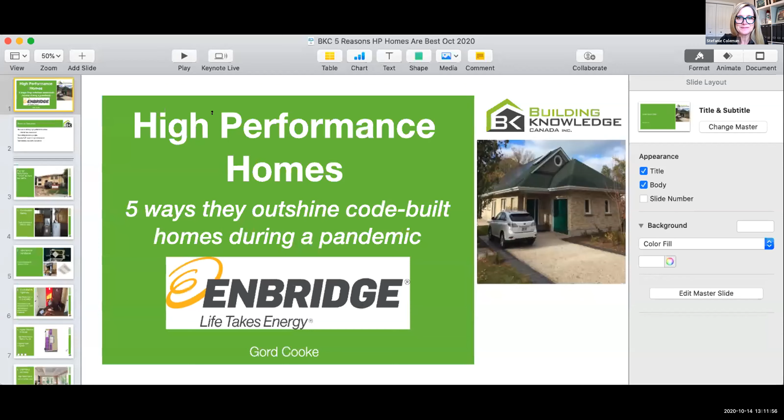So first, let me just thank Susan again. Susan's such a great friend. You and I have traveled together, been to various events. Such a great partner in the industry. I just can't speak enough. Of course, you always give me this opportunity to speak. That's so kind of you. But then that lovely message, as you just mentioned, is in this time of stress, let's try to be non-judgmental. Let's just help folks out. So thanks, Susan, for that. I really appreciate it.

And as Susan said, this seems like a timely topic. Well, I got my first question in mid-March. My own brother said to me, "This is probably stuff you know about, right? This idea that somehow the air quality, that we could help manage air quality." So I've written a couple of articles on it, done some research on it, trying to stay in touch with what exactly we can do in the housing world generally, or in the building world generally, to help with. And let's be really clear, it's still about physical distancing. It's still about hand washing. It's about managing, understanding the way the virus is in how it infects, that it has to be breathed in. And so we have limited things that we can do, but we're still going to be a part of this.

And I'd like to highlight that today, just the kinds of things that you can do. A very important theme, though, is the same things that you do to make houses energy efficient, high performance, are frankly the same things that we've known for over 40 years improves air quality, or at least the opportunity for air quality, health, comfort, wellness. So that's the most important thing.

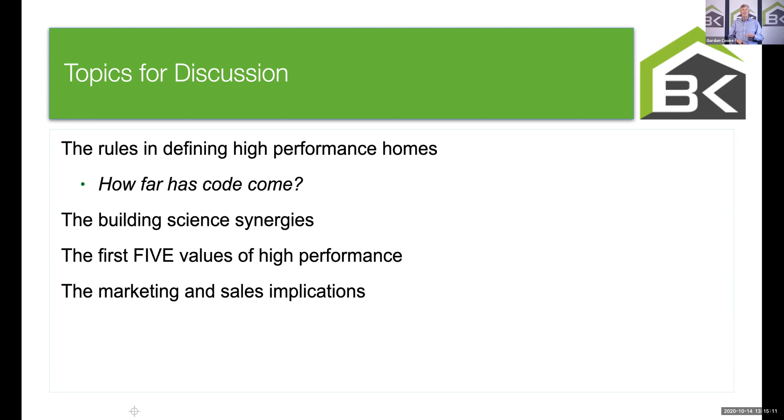And then Steph said, let's do 5 values. Of course, there's more than 5, but I'm going to try to highlight 5. And some of you will know that I kind of bridge between the technical side and the sales side. One of the questions you're going to ask me, is it okay for us to talk about this? I don't want to make it sound like we're selling snake oil. I just finished a series of webinars for Fortis BC for HVAC contractors on what's okay to say to homeowners, what is legitimate and what might be seen as taking advantage of the situation. So I do want to talk to you a little bit about the sales side of this and what is appropriate for you to say on the marketing and sales side. So let's get started and think about that.

I'm showing this image because this was an R2000 house. My good friend Ron Seaman, he was a builder. Now Derek and his son have taken over. They've built a couple of net zero places for myself and my family. This is a house that they actually built in 1986. This was Ron's house and then became his office. Thinking about home office spaces, you'll notice this was actually spray foamed from the outside. That was their methodology. And so these were the early days. 1982 was the start of the R2000 program. So I thought I'd give you a sense of back then. So that's almost 40 years ago, 38 years ago.

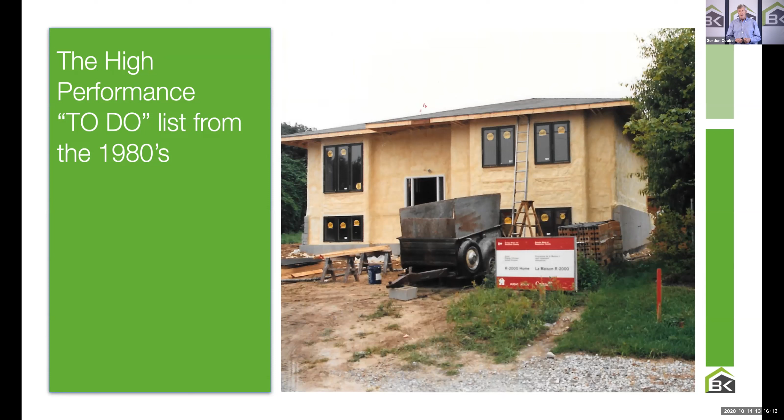What did we think was high performance back then? And there was actually a list made of the things that you should do, and more or less in the right order. That is, what order should we be thinking of these things first? So let's get started. A quick little list, 10, 11 items. If you're a note taker, take notes, or Steph, you're actually going to provide the presentation at the end, but it's useful to take notes just as a bit of a memory aid.

So the first thing you need to recognize is back then we had spillage susceptible appliances, natural draft appliances. And the very first element of a high performance house is in fact combustion safety. Getting to direct vent, sealed combustion, understanding combustion processes. After all, you wouldn't want to kill anybody. This was the ultimate in indoor air quality. Can't have a high performance house if we have the chance of carbon monoxide spilling or the chance of carbon dioxide and nitrous oxide spilling into a house. So you can start to see, even in the earliest days, there were concerns and issues around indoor air quality in high performance houses or in houses in general.

And what you should know is the directives came in code. So we recognized that in the early 80s. And in 1990 in the Ontario Building Code, 95 in the National Building Code, there were specific mentions made of the possibility of combustion backdrafting, spillage of appliances. In the Ontario Building Code, we started to move towards high efficiency equipment. In the National Building Code, there were just sections in there that said if you were putting in chimneys, you've got to do some work to make sure they're not going to backdraft. So the code kind of caught on to this one early on. It wasn't completely done, I would say, until a few years ago, where now high efficiency furnaces, direct vent sealed combustion furnaces, are a code requirement, or actually an efficiency requirement.

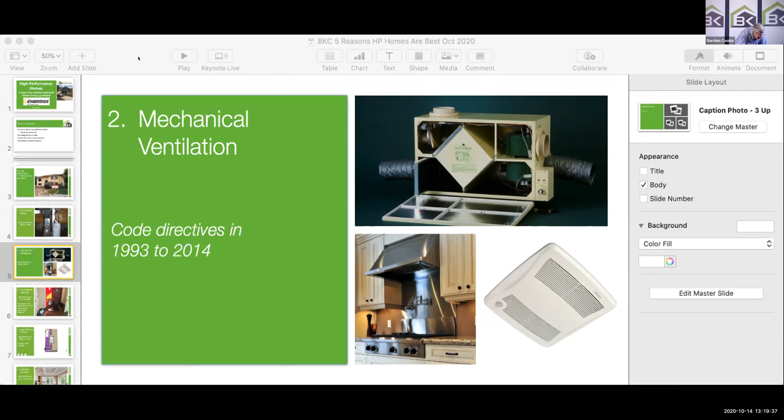Okay, so I'm not sure what you heard or didn't hear. I will just let you know that the second item on the list was mechanical ventilation. That is, number one on the list was combustion safety. Number two on the list of high performance elements was the capacity for continuous mechanical ventilation. Back in 1982, it became code in Ontario in 1993, made its way into the National Building Code, I would say more comprehensively in 95.

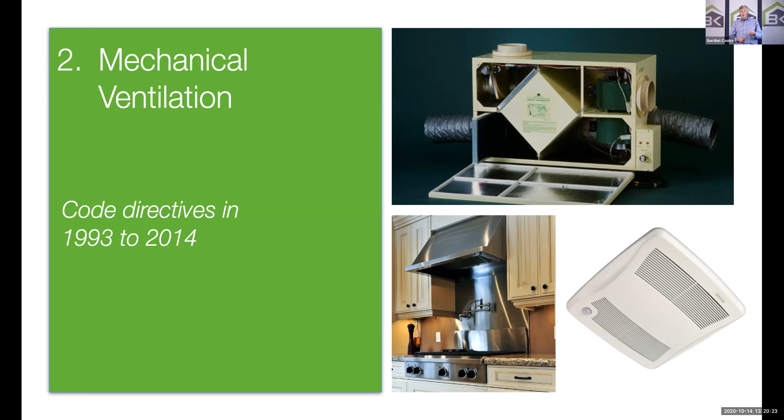It wasn't until 2014 that HRVs became more or less ipso facto code requirement in Ontario. Still not a specific code requirement in the National Building Code, but certainly strongly encouraged. So number one was combustion, number two was mechanical ventilation. Number three on the list, through work from Harold Orr and others at the University of Saskatchewan and Ottawa, was air tightness. And as early as 1982, the R2000 program set the bar at 1.5 air changes per hour at 50 pascals. That's still considered to be the go-to level for net zero.

The passive house folks in Germany have said, let's go even tighter than that. Oddly enough, this is still not a code requirement, even though it was number three on the list of things to do, and still is the most important thing that we can do. We haven't made it into code in terms of a performance metric. We have some prescriptive requirements, 17 clauses that say make a house tight, but other than Vancouver and BC now in total, that's the only place in Canada that now requires air tightness testing.

Interestingly enough, in the United States, 28 US states now require blower door testing of all houses to an air change level of 3 in northern zones to 5 in southern zones, but at least they have that on their list. So we're still waiting for performance measures in the Canadian code, even though we've known since 82 that this is the single biggest thing that we should be doing from an overall high performance element.

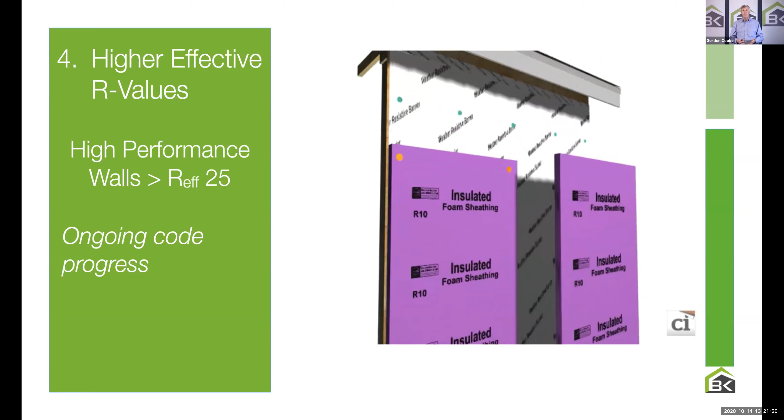Number 4 on the list is higher effective R values. Imagining ourselves getting to primarily continuous insulation, doesn't have to be continuous insulation, but the idea of effective R values, that it's not just about what's in the cavity, but what's the overall performance. And the codes are moving towards that. I'm going to give you a metric. I'm going to say in all parts of Canada, as a minimum, we need an effective R value in walls of 25. Now, Edmonton, you're going to need more than that.

Ottawa, maybe a little bit more than that. Certainly in Timmins, Ontario, you're going to need more than that. But generally speaking, an effective R value of 25 to 30 gets where you need to be. Codes aren't there yet. They're getting close, but they're not there. But at least codes move towards effective R value. So those are the first 4 things on our list.

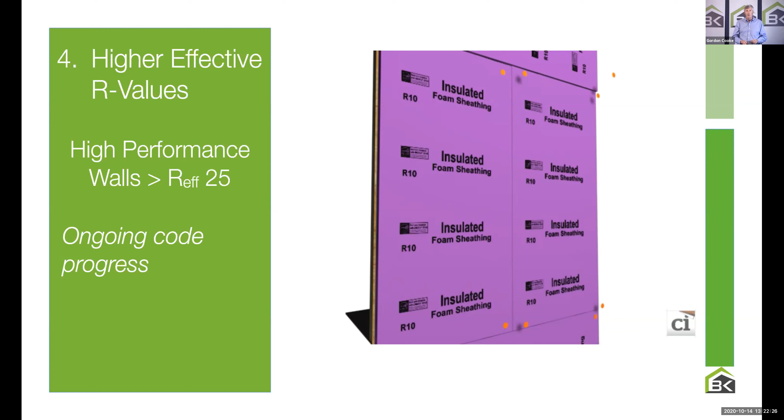Next on our list is windows, high performance windows, or I would say optimizing window performance, understanding the gains versus the losses. Now we need to remind ourselves, back in the 80s, we weren't doing any air conditioning, or at least not much. And so we wanted that solar gain coming through glass. So it was all about optimizing solar gain. Our software programs were written around that.

Now we've kind of done a double take and realized, wait a minute, in certain parts of Canada there's as much issue, not as much, but there is an issue in summer as well as winter. So we've thought about, let's optimize the U value, get as low as possible, and then let's optimize the solar heat gain coefficient so we get as much winter sun as we can without overheating in the summer.

It started to become code directives in Ontario in 2009. That is, we started to see things like mandatory low E coatings, argon gas. The National Building Code does have performance measures, as does the BC Building Code in terms of glazings, but not quite as comprehensive as, say, the Net Zero program that helps us understand where to put these into the metrics. So just imagining, that's number 5 on the list.

Number 6 on the list is proper water management. We started to realize in the 80s that as we add insulation to walls and attics, the drying potential of basements, walls, and attics is not there anymore, and we have to do a better job of water management. Oddly enough, this is still pretty outdated in code. Codes have actually done a really nice job below grade, other than they still require vapor barriers below grade, but they've done a nice job of encouraging drainage layers and water management.

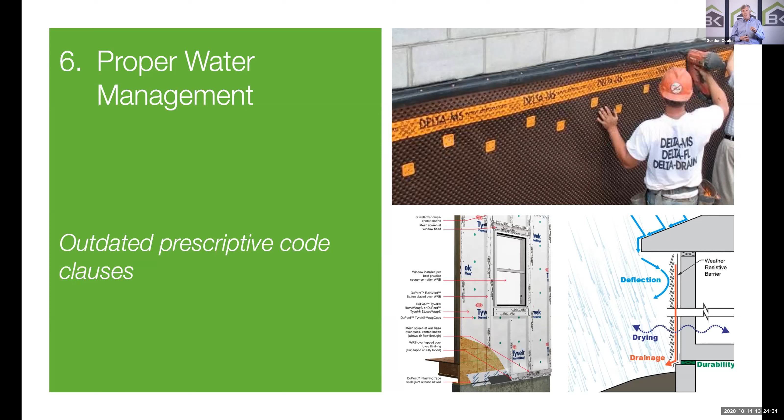And we still have some pretty old references on the above grade portion, and I'm going to counsel builders, architects, and designers on this call to make sure you're incorporating new elements with respect to water management. And I'll come back to that one in a second. That's number 6.

Number 7 on the list. Now I've done the enclosure, let's go ahead and get to the highest possible performing mechanicals. Codes got there in terms of 96% efficient furnaces when you're installing them. We're seeing a move towards heat pump technology, of course. I shouldn't say of course, but heat pump technology. So we're going to see higher and higher performance. So codes have been working away at that one as well.

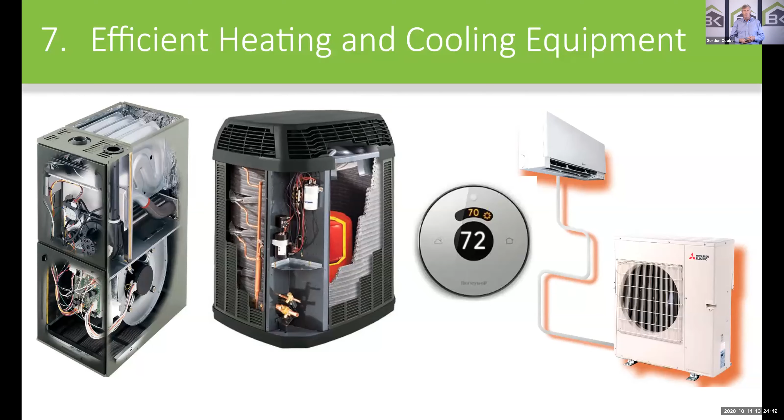And then we need to think about effective distribution. In 2014, we started to see requirements for duct sealing. That's always been on our list back in the 80s, to make sure that the air got where we want it to go. So that's number 8 on the list.

Number 9 on the list is water heating effectiveness. And we've seen some changes there to code. Frankly, the minimum water heater effectiveness is still in the 0.67 range, but we are starting to see some increases and even interest in, certainly in condensing, but even in heat pump water heaters. So that was number 9 on the list.

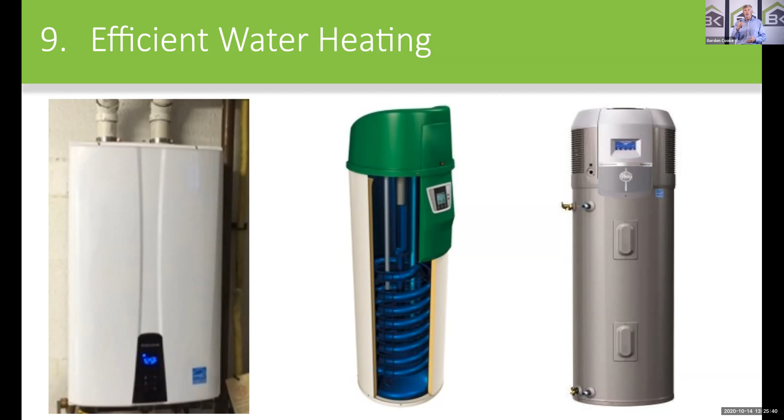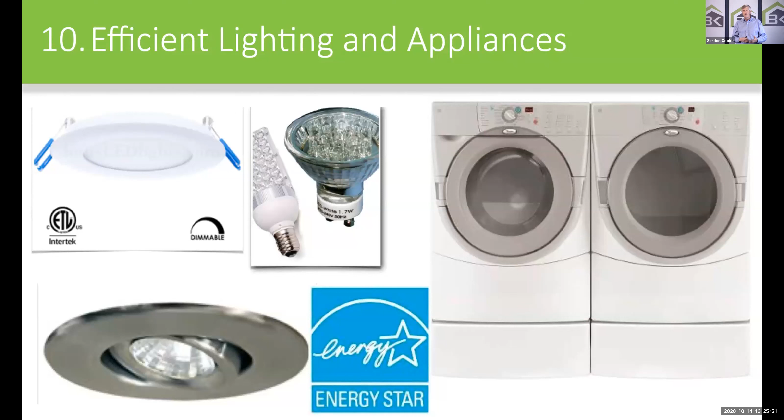And I'm going to remind you, this is a list that's 40 years old. You start to check off, have I got these done? Which of these have you gotten done? And it's not a question of if you're going to be doing this, it's a question of when. Some of these are over and above code, some have already been handled by code, but I need you, the folks on this call, to start working your way through this list and make sure you have these elements. And of course, a little less in our world, maybe more in the homeowner's world, are the choices with respect to lighting and appliances to get that efficiency done.

So there's a list of 11 items. And I literally have that list from back in 1986. I've just brought it out for you. We've trained to it in the United States. The Energy Environmental Building Alliance still uses this list; these are the checklist items that you want to work yourself towards. So that's high performance, and I've highlighted some of the differences with respect to code on those 11 items, if you will. And then we remind ourselves that this actually does have really good basis in building science.

That is, from day one. Well, I wouldn't say day one. In the early 70s, we built some incredibly efficient houses that were neither healthy, safe, nor durable. But by the time the R2000 program came along in 1982, there was very much a holistic or house as a system approach. Jim White and various others coined that phrase of house as a system.

And the idea is that simultaneously we should be making houses healthier, safer, more durable, more comfortable, more efficient, more cost-effective, aesthetically pleasing, and ultimately sustainable. That is, we don't want to compromise one for the other. I can't put in huge panes of south-facing glass and pretend that I'm not going to have a problem in the summertime with respect to overheating and cooling issues.

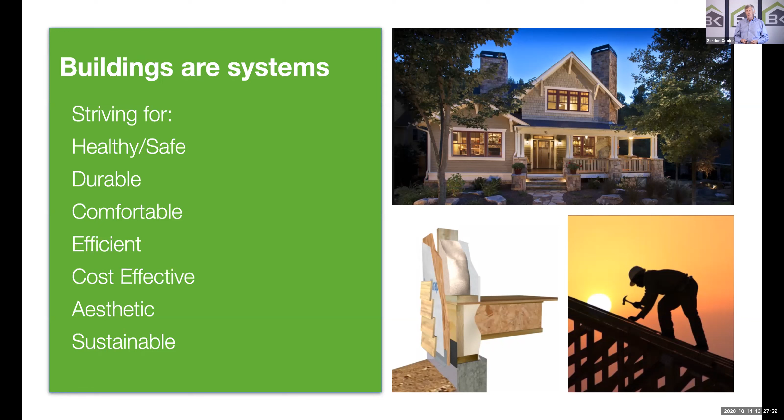Similarly, we can't make a house airtight without looking after air quality. So these are the tenets that have been with us since at least 1982. You can't compromise one for the other. And you could start to imagine right here, this plays into the whole pandemic idea, that if we can make a healthier house, and I'll highlight what that means from the virus, from the COVID perspective, where we know the science is now, but we don't want to compromise on that.

And interestingly enough, there are some pretty simple rules around building science. So at the same time that we had developed the high performance checklist, along with it came the science. The science says heat moves from hot to cold, moisture moves from hot to cold, moisture moves from more to less. These basic building science rules are available too, obviously, when you get this PDF. But go ahead and research these. Construction Instruction in the U.S., EEBA, Energy and Environmental Building Alliance, they just did a series of sessions, all true to these elements. The one at the end, interesting, all the action happens at surfaces, understanding moisture and moisture dynamics in houses. These are the kinds of things that we need to get to.

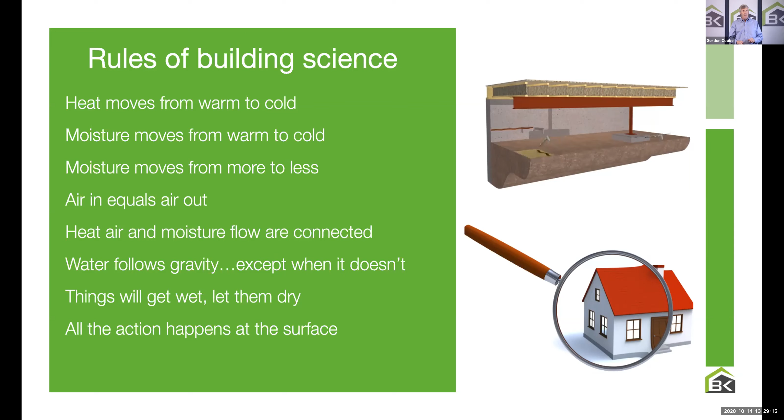Let's start with managing indoor moisture levels. And Steph, there is a poll question that we would like to ask, around what is the optimum or the right relative humidity range? Could you launch that poll for us? Do I have to stop sharing? No? Okay. What is the right relative humidity range?

Where are those last stragglers? Thank you for that. And that's interesting. It turns out you're all winners. I was kind of trying to do the grade 2 thing. You're all winners. Frankly, we're going to see here exactly what this means, and we're going to fine-tune this a little bit. But I am glad to see you have 35 to 40 and 45 to 50 as being an interesting range. The sharp ones on the call should have been asking, and probably in the chat are asking, what season are you speaking of, Gord? But thank you for doing that.

Let me just, how do I get rid of that, Steph? I got to get rid of that. You should just be able to, yeah, there's a little X. You should just be able to close the box. Yeah. I think I got that. Yeah, but now my screen won't work.

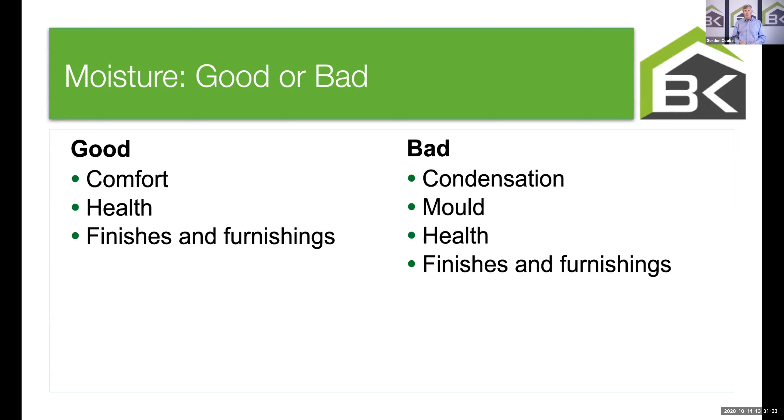There we go. So from a moisture perspective, what we need to remind ourselves is moisture is both good and bad. Good for comfort, good for health, good for finishings and furnishings, but bad from a condensation potential, bad from a mold potential, sometimes from a health potential. We just don't want it too dry. We don't want too much moisture, on the other hand. So finding a moisture balance is where we'd like to get to. Sometimes furnishings and finishings are going to absorb moisture, and that's going to be a problem as well. But typically we like to say it this way: moisture is good for the people, but bad for the building in general.

This, though, is the important slide. I was kind of interested because we used to use this slide back in the 80s with CMHC. It's called the Sterling chart, developed back in the late 70s, early 80s. It was just validated by ASHRAE, the American Society of Heating, Refrigeration and Air-Conditioning Engineers. You get the idea. ASHRAE, my apologies, I slipped up there. But look at this. It's kind of interesting from a virus perspective. That optimal zone is 40 to 60, and most of you were bridging on that one, so that's good news.

The infectivity rate of viruses, the amount of time that it's still viable, is reduced if you can keep the relative humidity between 40 and 60%. Lower than that, and it tends to have higher infectivity rates. Higher than that, it tends to have higher infectivity rates. So this is no surprise to us. We just haven't used it in the last 40 years to talk about viruses.

We used it to talk about, I don't know, ozone production. We used it to talk about mold, and you'll notice mold and fungi under 60%, you basically get rid of mold. That was my history. Keep it under 60 and you're in really good shape. So this is an important slide, one we can bring back out. What this means is we've always known that 40 to 60 was in a good range. We just weren't thinking viruses.

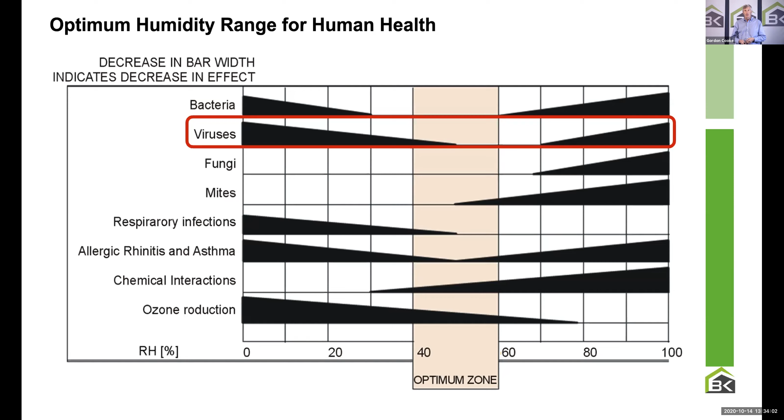Now, you and I both know that in a typical old house, if we tried to keep relative humidity as high as 40% all winter long, we would have nothing but calls and condensation. So we need to fine tune this a little bit from a Canadian context. We need to think about a winter range and a summer range. We need to think about 50% in the summer, plus or minus 5. Could we get lower than that? Yes, but it's really expensive from a dehumidification and air conditioning capacity. Winter, 35 plus or minus 5.

And you go, Gord, I thought you said 40. The problem is most houses, old houses, can't do more than 35 on cold winter days. And it's not an all or nothing. You'd want it to be at 40% most of the time. And then if you do get condensation on windows, that trumps the virus, because I don't want mold and damage to the windows, so I'd have to lower it. Unless I had some features in my houses that would allow me to raise that moisture level in the wintertime. And you probably know where I'm going with this, but it's really important that you understand the value, the choices you're going to make.

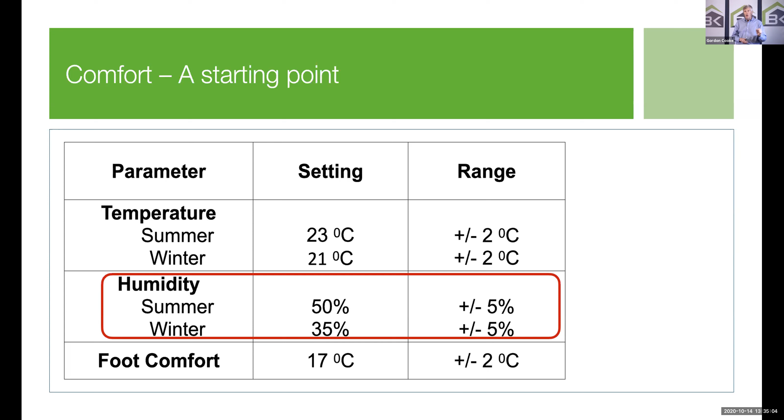And it turns out there are 3 opportunities to reduce the risk of condensation on surfaces or in cavities. One, of course, is to keep surfaces warmer, that is, higher energy efficiency on those surfaces. 2, reducing or managing the relative humidity in the wintertime. And 3, managing airflow so I don't have warm, moist air leaking into cold cavities. So these are important elements.

And I just need to remind you, look at these studies. As they finished the R2000 program, 1982, CMHC immediately started a bunch of research on indoor air quality. Research in 1988 on 18,000 children in 20 different communities. A study in Wallaceburg, Ontario, where they looked deeper into houses. A CMHC basement study, a pilot study on asthma, and still to this day an ongoing study of immune systems and housing. They are following 6,000 children. They're about 7 to 10 years into it, documenting what's happening in their houses and how it impacts their health and immune systems. So very powerful work that's done by CMHC and Health Canada.

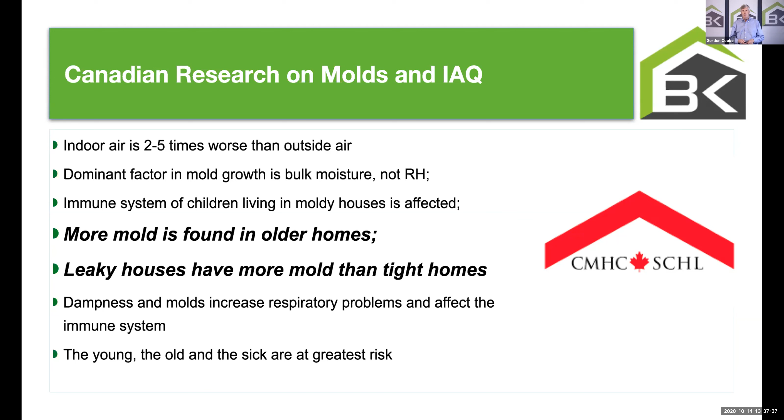Here's the basement study. No surprise here, right? That top statement. They tested 405 basements and found that more than half of them had mold problems or moisture problems. Then they took 27 houses that were noticeably moist and found toxic mold in 15 out of 16 visibly moldy houses, out of the 27 investigated. So they took some that didn't have mold or moisture problems, some that did, and always found toxic mold.

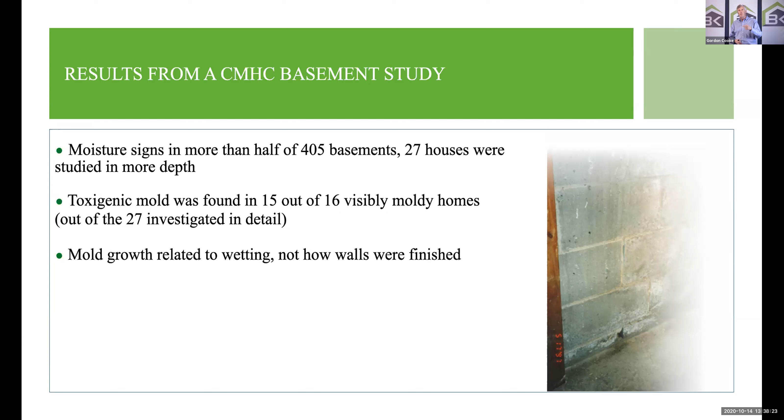And I'm shortcutting a long conversation. I will encourage you to go look up CMHC's data on this. The point is there's a link between moisture, molds, and health in houses, and we're going to link that to the pandemic and viruses as well. So very powerful research that was done.

And if you're managing moisture, trying to control moisture, it's about keeping surfaces dry through drainage and keeping materials dry during construction. It's about water managed foundations. It's about reviewing plumbing and HVAC specifications to avoid leaks. And if surfaces do get wet, let them dry quickly, which means venting and ventilation, which means dehumidification. And these are the elements where you would ask, am I including those in my high performance houses? And the answer would be yes. Almost by default, you are doing these things already.

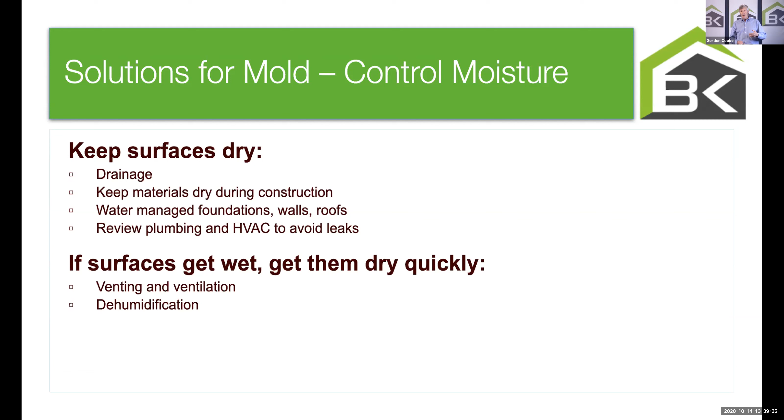In contrast, I said code's been working away at this, but think about older houses built before the 90s when those changes were made. These are houses that have severe susceptibility to moisture problems and the lack of moisture control. We end up having to add moisture in the winter, dehumidifying in the summer, and really not having building materials that are not susceptible to mold and moisture problems inside of houses.

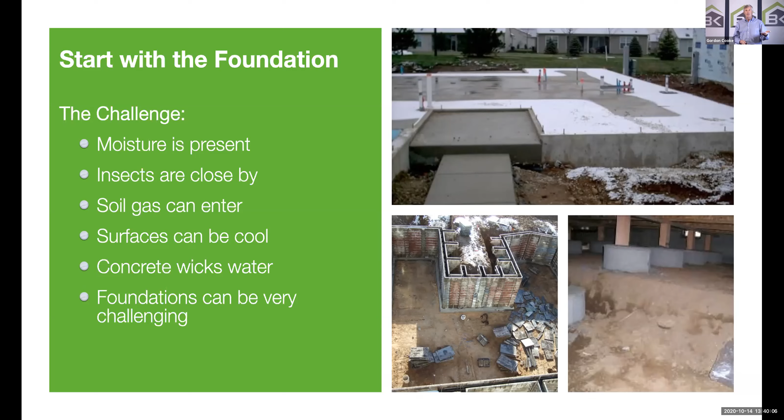So one of the ones I just want to key in on, going a little deeper on this first one, is foundations. Why foundations? Because it's really hard to live in holes in the ground. There were whole communities, cave communities, that were abandoned in the 50s because they realized this isn't good for people's health. That was Matera in Italy, 50,000 people living in a cave city, and they realized that tuberculosis rates and viral and bacterial rates were through the roof, so they moved people out of those houses because living in holes in the ground isn't easy. It's so challenging.

So we need to remind ourselves, there's the basement of the non-high performance house, the old house. Can you smell that basement right now? And you all can smell it. It's dark, damp, musty, cold. And so we need to imagine what we can do in high performance houses to turn that into bright, dry, clean living spaces, where we'd like to get to.

Those are the new expectations for our clients who are spending more time at home. Maybe the classroom's in the basement and the office upstairs, or maybe it's the opposite. Maybe your office is downstairs and the kids upstairs. You'd like both of those places to be equally healthy. So we need those lower living areas to be warm, both from an air and foot comfort standpoint, make it dry, make it bright, make it healthy, and ultimately make it usable.

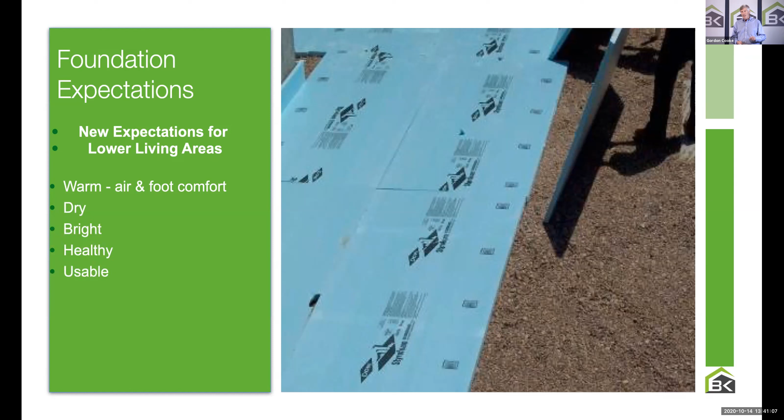So the benefit of a high performance house is that you now have more usable spaces, because people are using their houses differently. That's not exactly moisture, but you see the added benefit. And so think about all the moisture sources in basements and the solutions that we have in high performance houses, recognizing that when you build a high performance house, because you're going to be insulating it better, you take a much better tack in terms of managing moisture in those basements.

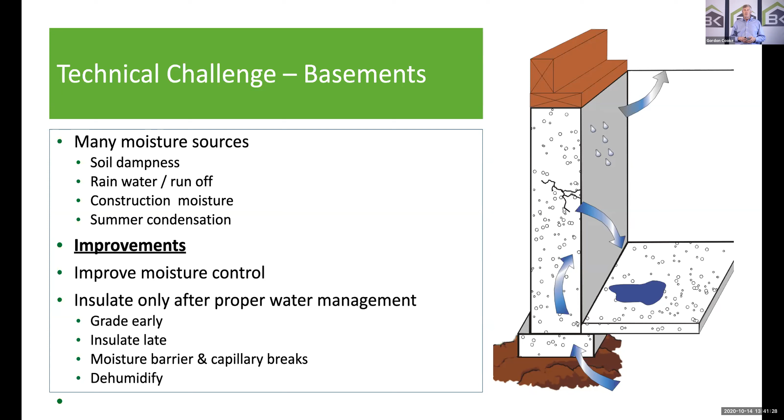So I'm keying on moisture a little bit just in basements, just so you have a sense of how deeply we can go into this. But something as simple as a drainage layer on the outside of a basement wall on the right-hand side there. That drainage layer on the outside of that house allows you to maintain better levels of moisture, relative humidity inside the basement, because there's so many moisture sources trying to dry to the inside. And if we don't have that ability to dry to the inside, then we have to make sure we keep the water out. So very powerful, very important to understand.

As simple as that is a high performance element that actually has play against the pandemic, against the virus. It means that you can manage moisture levels in basements to a much finer degree, and therefore reduce the infectivity rate of those viral components. You would have a sense of this.

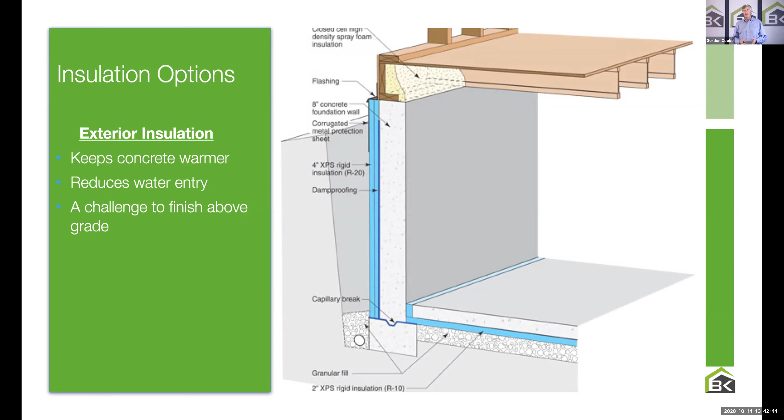This is from the state of Minnesota. Minnesota now requires insulation on the outside of basement walls. You cannot insulate on the inside unless you first insulate on the outside. That's, of course, one of the elements of high performance houses that we're trying to move you guys towards. So keep that in mind. That means that concrete surface is warmer and drier, and therefore better able to manage moisture and temperatures and comfort inside of those basements. So just really powerful.

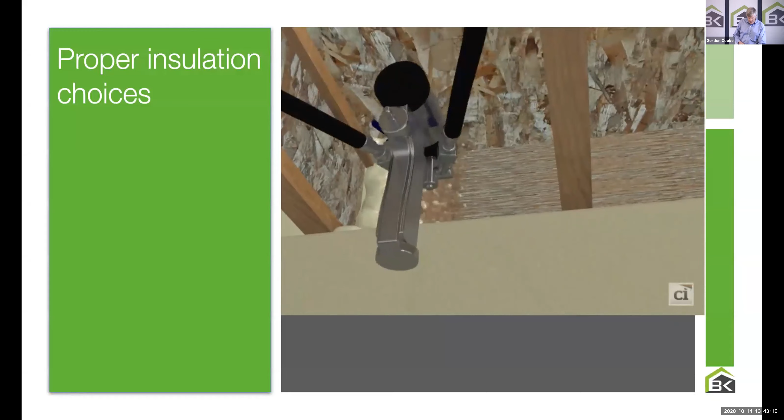Here's another choice. This was drawn by John Straube and Joe Lstiburek. I'll just show the animation. Some of you guys have seen this, but here's a great way to do a basement wall, high performance basement wall. 1 inch of extruded foam tight to the wall. XPS, could be EPS as well, but I'm showing XPS in this case. This is showing a spray foam rim. Doesn't have to be spray foam, but you get a sense of the kind of things that are going on to turn this into truly livable space.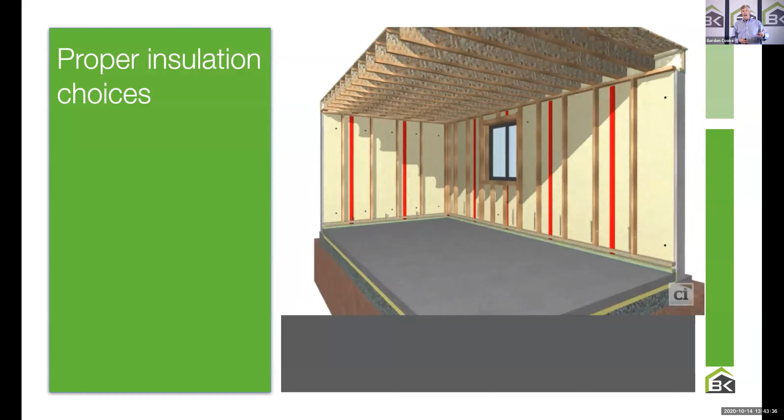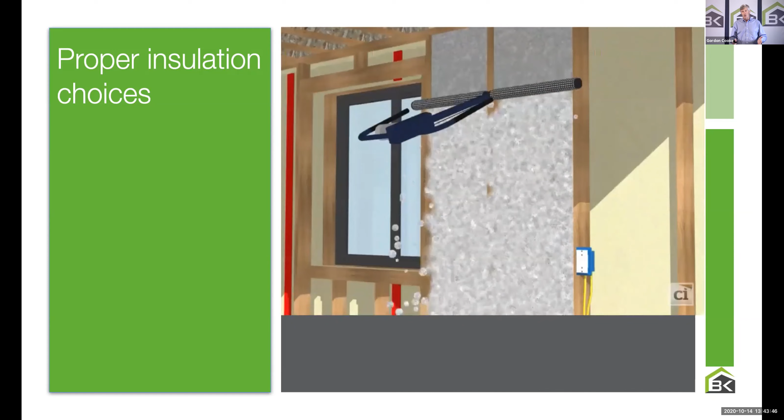So a high performance house built to these kinds of specifications manages moisture, manages temperatures much better than the old house. I get this all the time. People are looking at buying an existing house. Well, the basement's finished. Is that a good thing or a bad thing? Unfortunately, we just don't have reliance that the basement is finished correctly or that it was able to manage moisture. This is just showing a blown-in insulation. It could be batt. You could foam the whole thing. That'd be fine too, but I'm just showing it as a blown-in batt system in this case.

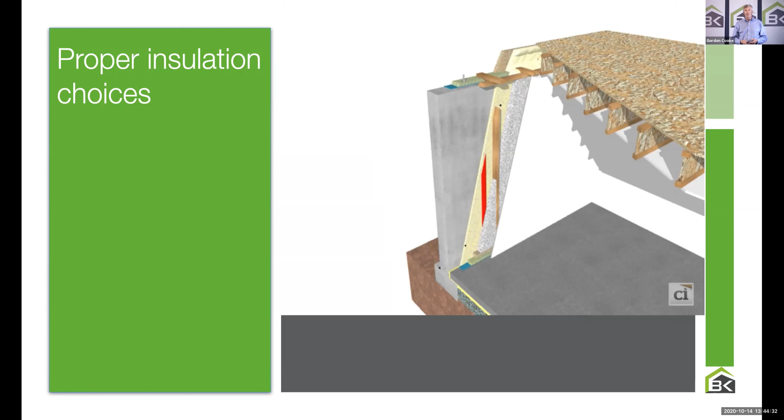But the magic of this wall is the way it manages moisture and condensation potentials inside this element. Notice no vapor barrier on this wall. You can show by code with the right amount of foam on the outside wall that you do not need to put a vapor barrier, which would allow this wall to dry to the inside as well as to the outside, or at least maintain the moisture on the outside. The key to this wall is the understanding that moisture coming through the concrete stops at that XPS layer, stays in the concrete, not affecting the inside occupants. Moisture coming from the inside in the wintertime, rather than hitting cold concrete and condensing, it's now hitting the warmer foam. We can maintain much finer levels and tighter control over relative humidity rates in houses.

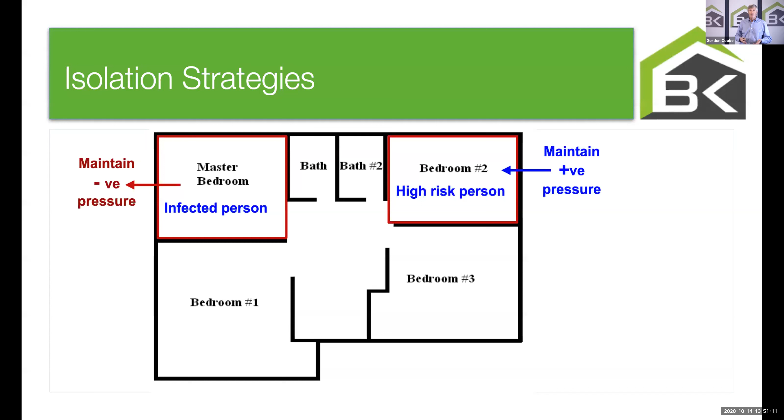But we've spent a long time, Tex McLeod and I, helping clients who are asthmatics, clients with environmental sensitivities, and now clients that might be sensitive to viruses. We would say, let's maintain a positive pressure in their room. Let's go a little further. Let's create an independent HVAC system for each of those spaces.

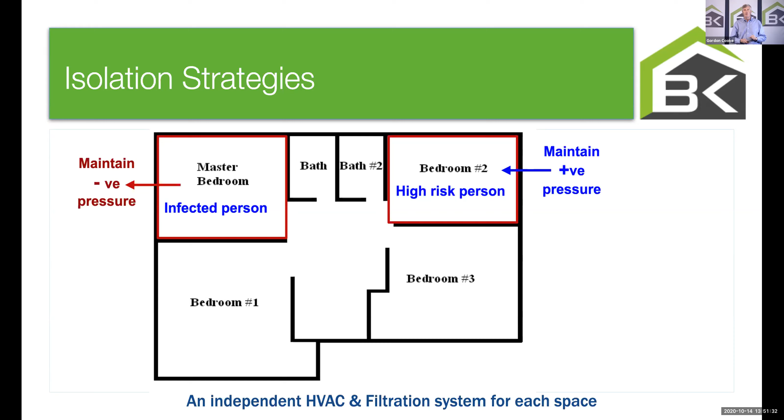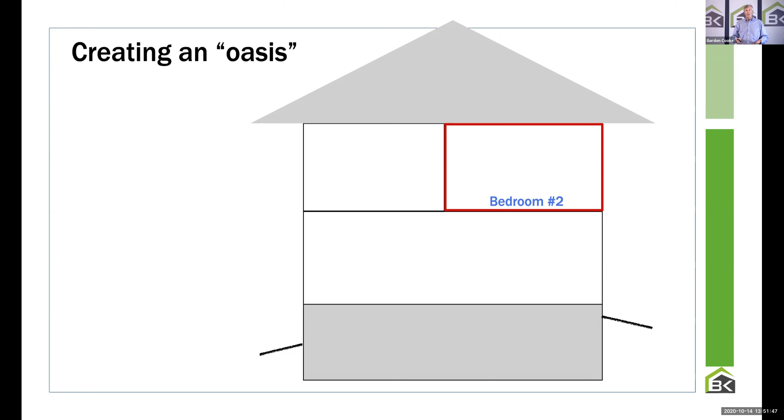And my point here is, in high performance houses, it's much easier to do this because you have tight control over the building enclosure and tight control over the way that assembly is built. So the idea here is to create, it's a great term, an oasis. Imagine all of your clients who might be worried about COVID, but maybe more important, thinking about Nona, who's now come to live with them, or a young child who's just come into the house. Should we be able to create a really nice safe haven, an oasis for them?

And imagining ourselves maybe with a separate heating cooling system, wouldn't have to be, but in a high performance house, how much heating cooling do you actually need for that little room? You don't need much, not like the old days where I needed two 6-inch ducts running there. Maybe I could do this with one small little heating system or cooling system in that one area.

Or better yet, let's take the HRV or ERV and dump it through a HEPA filter and positively pressurize the house. Yes, we're going to take air to other locations, but imagine taking your HRV or ERV and ducting it directly in from outside into somebody's bedroom, positively pressurizing their sleeping area with fresh filtered air.

This is really nice, and you have all of the elements of this, right? You're already doing the ventilation system. It'd just be a matter of reducting it to create that really nice safe space for high-risk folks in that bedroom. And thinking about HEPA filtration and keeping that positive pressure in that room is very powerful.

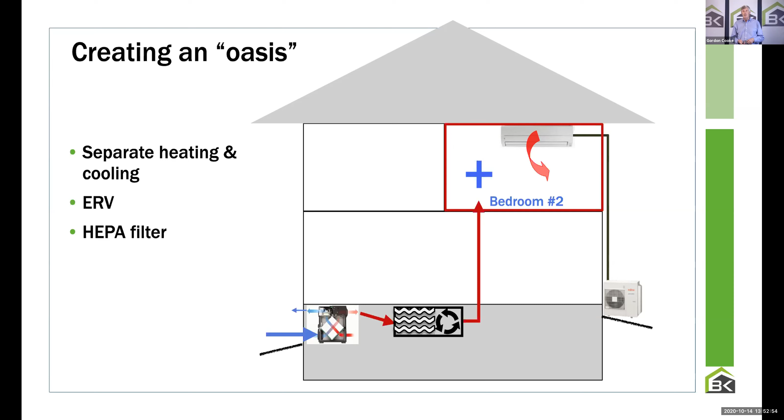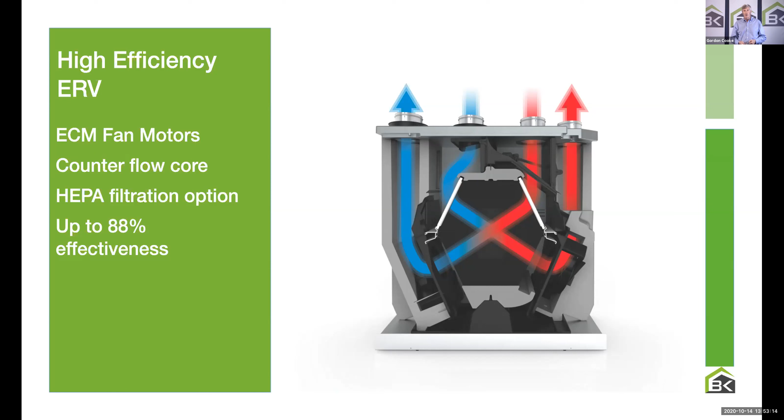This happens to be an ERV or HRV that has a HEPA filter built into it. There's 2 or 3 on the market now. So now the fresh air comes in, gets preheated, pre-cooled, manages the moisture, and now passes through a HEPA filter. Now you could duct it directly to bedrooms. See what the advantages of high performance houses might be for managing COVID. Very, very powerful. So that's number 2.

We're doing really well on time. We have 3 more to do. The first was managing moisture. The second was the ability to control spaces. Third, no surprise, you might have thought it was top of mind, but I'm saying it's number 3 on the list, is the comfort of spaces.

You may recall at our spring camp, some of you were there, we had Robert Bean, I would say the foremost authority in Canada on comfort, and he challenged everybody to have a copy of ASHRAE 55. This is the comprehensive standard on human comfort. And what it says to you is our sense of comfort is a function of air temperature, humidity, air speed and drafts, surrounding surface temperatures, gender, age, and activities, and ultimately metabolic rate and clothing.

And here's what's important. Have things changed a little bit? That is, if you're now at home, you're teaching from home, you're working from home, you're now in that particular space much longer. And it turns out your body becomes acclimatized or sensitized to that space. And so things that didn't used to bother you because you're only there for maybe an hour or 2 in the evening in the family room, well, now it's the classroom.

And now you tend to notice, yeah, it's a little chilly in here. Didn't notice it before. Maybe you wrapped yourself in a onesie, didn't worry about it. The basement's cold and clammy. Didn't used to notice because you were just maybe doing hobbies down there.

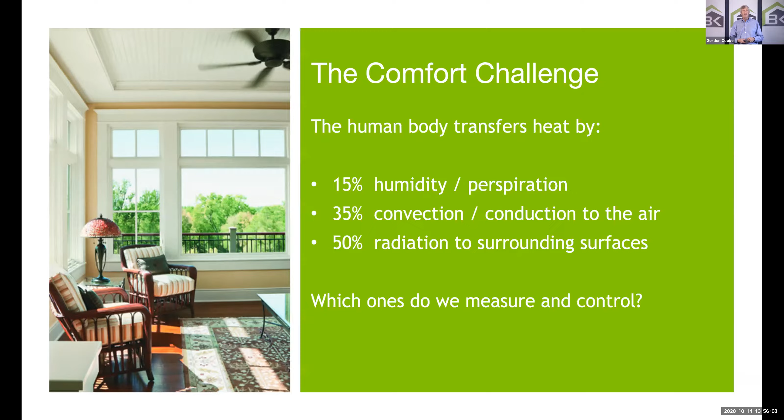That east-facing room is now your home office or the school classroom. Oops, that overheating becomes an issue for you early in the morning hours. And then in the afternoon, it's the west-facing windows that are a problem. So understanding these changes, and I would just highlight this idea. There's the ubiquitous home office, right? Doesn't this look idyllic? But does this change the time spent indoors, day and night, and the changes we're going to see?

High performance houses. I can tell you, some of you will know if you go to buildingknowledge.ca, there's a series of cottage videos. My brothers and I built a cottage. It's been continuously occupied now from mid March through to just the last weekend, Thanksgiving weekend.

Why? Because my nieces and nephews are realizing that rather than working from their 500 square foot condo in Toronto where the sun beats in and then it's cool at night, they're coming to the net zero high performance house because it's more comfortable, more natural light without the interruptions, if you will, or the problems that they might have with comfort, the moisture management and so on.

And the types of activities have changed. Susan highlighted, maybe it's a school classroom, kids running around. Maybe it's home office, and what are your office activities? Maybe you're actually expected to do some drawing or some work. I don't really know what those activities might be. Maybe you're creating moisture, or maybe there's a need for management of moisture for your work items, for the papers that you're working on, and so on.

And even requirements for sound control, and from head to toe, the temperature, humidity, and light. Of course, we're going to want that natural light, but that light comes with a penalty, at least in an old house or code-built house, with overheating from that glass or overcooling, radiant losses at night. So you can start to imagine the window choices that you're going to make.

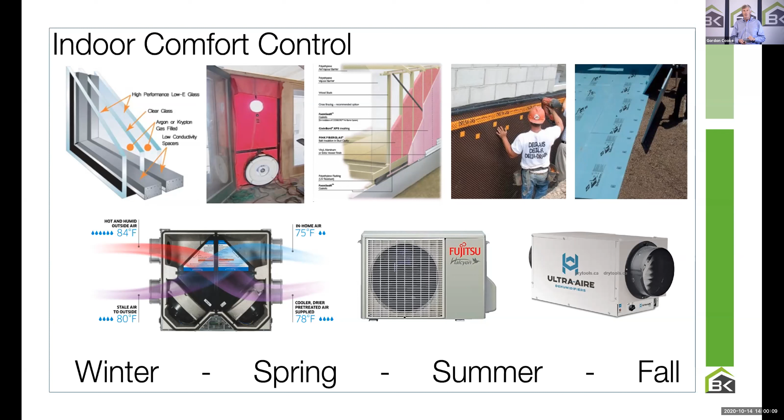Number 4, I'd be remiss, and you might say it's a bit of a stretch. No, it's not. Sorry, Steph, question? Yeah, a couple of questions came in, so I thought I'd take this time before you move on to 4 to touch on those. So the first one is a question on market trends.

Because basements are expensive to build and challenging from a moisture perspective, with increased risk of flooding due to climate change and daylighting challenges, do you see any market trend moving away from basements in Canada?

That actually may have been my brother asking that, because that's what he asked me. Why aren't we doing a basement in this cottage that we were building? I said, we're not building basements because we're near the lake, chance of flooding. Here's what we're going to do, Jim. We're going to build up. We're going to take an attic truss, and we're going to put some space up above.

So much like they do in the South, right? They build slab on grade, some of them even building on stilts now. And then they'll use an attic truss and actually build some space there. So my opinion would be that basements we could avoid. And when we've developed really nice, comfortable spaces up above, we go, okay, let's find a new place for storage or a new opportunity.

That said, if we're doing high performance houses and doing a better job of basements, some might say ICF by all means, but it might not necessarily have to be ICF, but really proper location of foam. Foam's on the outside, a really good water management system on the inside, really good slab. Those basements are no longer at risk. Still at risk from flooding, perhaps, but at least not from moisture management on a day-to-day basis.

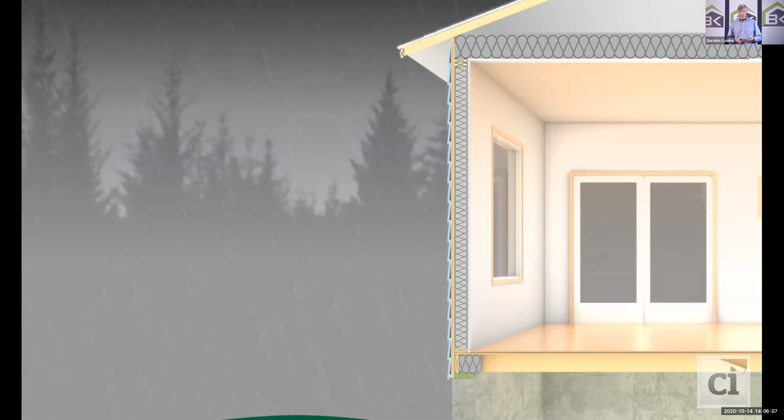If I truly understand heat, air, and moisture flow, remind yourself that moisture is the #1 thing that destroys buildings and building materials. We're going to do a better job of moisture management inside the building. We need to think about a better job of moisture management on the outside of that building. And when we imagine the moisture sources in houses, and the risk that's changed, we used to rely on roof and roof overhangs to do our deflection of moisture.

Big overhangs. Now we're building more modern, flat roofs, more bump out windows, and now we're relying on the windows and the cladding system to deflect water away. So of course we want that deflection, but we need to understand the risks have gone up in our houses.

Steph? Yes, okay, so Thomas has provided clarity. He said in your schematic, it showed a frame wall inside the continuous insulation. The bottom 2x4 was a different color and appeared raised off the floor and was pinned down. Great, I love that. I'll answer that after I finish this animation. Is that okay? Yep, thank you. I'll do that for you.

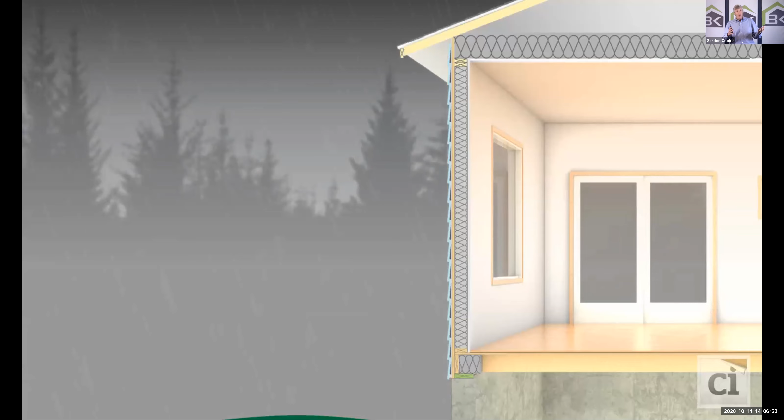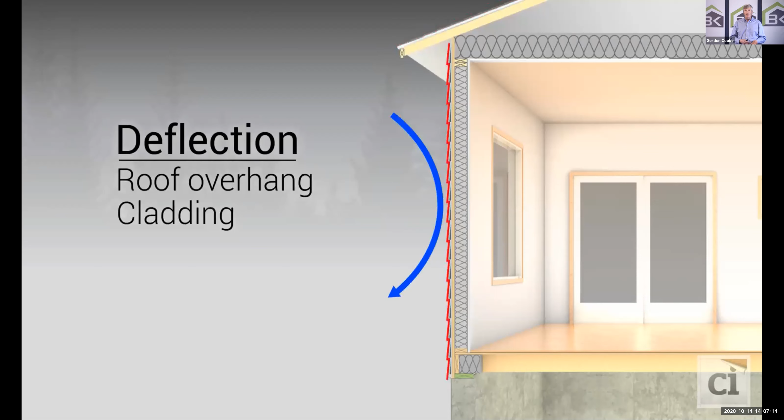So we were talking about deflection of moisture and understanding that our risk factors have gone up. And remember, we have more insulation on our walls and attics, therefore less drying potential. So we do need to be mindful of extreme storms, those kinds of issues. We used to rely on cladding materials and our roof overhangs to give us that deflection. Now we need to recognize, we always needed to recognize, that water actually does get in behind that cladding system. And when it gets in behind, we need to let it out.

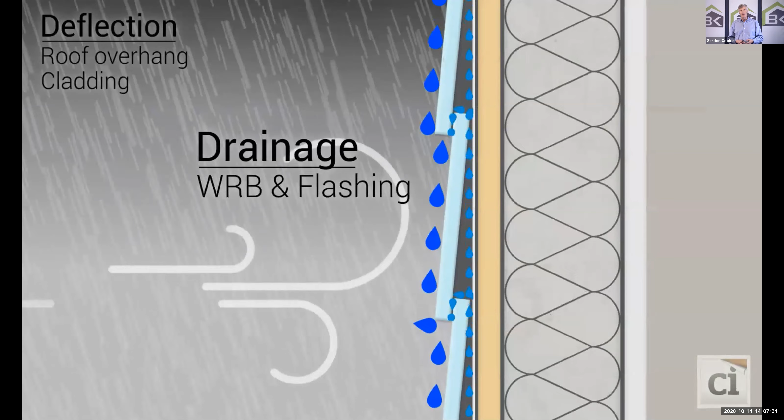So we need to do a more comprehensive job, and high performance builders tend to be doing that. When you put continuous insulation on the outside and then strap out from there, you're creating really nice drainage planes. So when you're using continuous insulation, you also get to talk about the durability benefits. And there's our good grading and drainage as well.

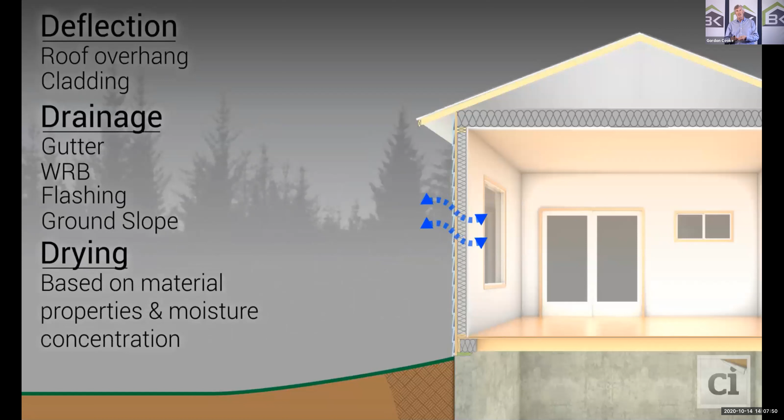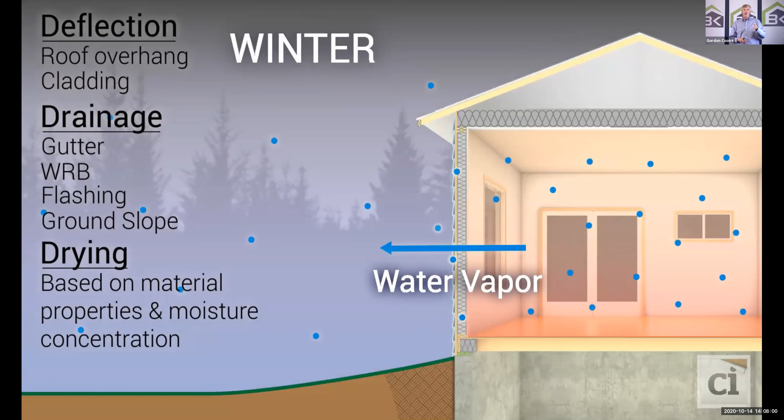The next item on the list would be the drying potential, mindful of the fact that we have less drying potential in our buildings, and high performance houses recognize that with the type of sheathing products, the choices we make with respect to weather barriers, the choices we make on the inside of basements, for example, with respect to drying capacity of vapor barriers to allow moisture to drive back into the building and the basement.

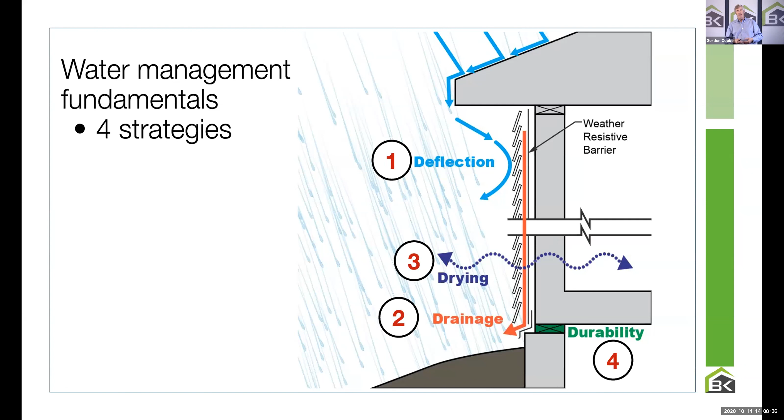These all become really nice building science mantras or metrics with respect to durability. So the same things that you do, insulated sheathing as an example, air tightness as an example, those same things help us with the durability and the resiliency side of that. This idea of managing deflection, managing drainage, managing drying, understanding the elements of building science. All high performance builders have taken specific building science training to help them understand those key elements.

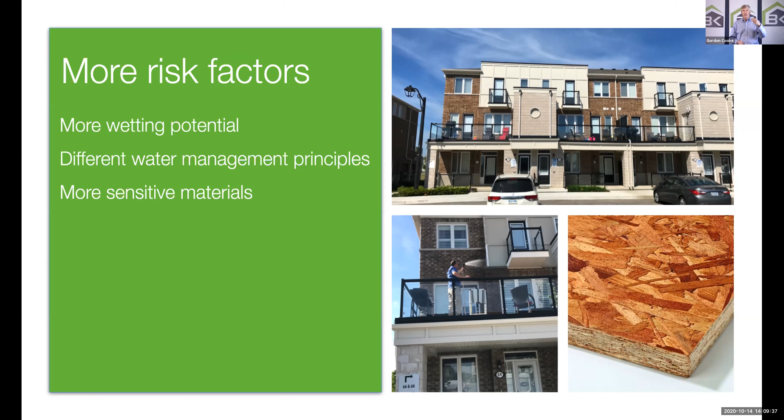On the bottom left, they're actually watering this building. Within 20 minutes, this water ends up in the unit downstairs, 12 feet back, inside the kitchen ceiling. This is by no means a high performance builder in this location or in this application. So the same things that you do for safe, healthy, comfortable, energy efficient also have an impact on durability. So making sure that we're managing water correctly in the way we install our windows. So we try to find those appropriate materials.

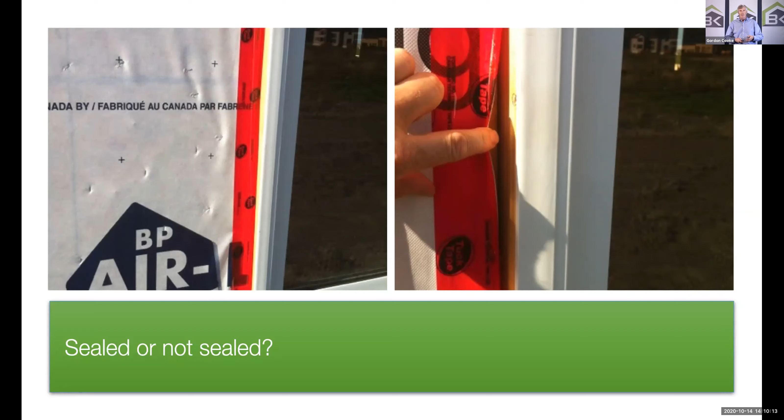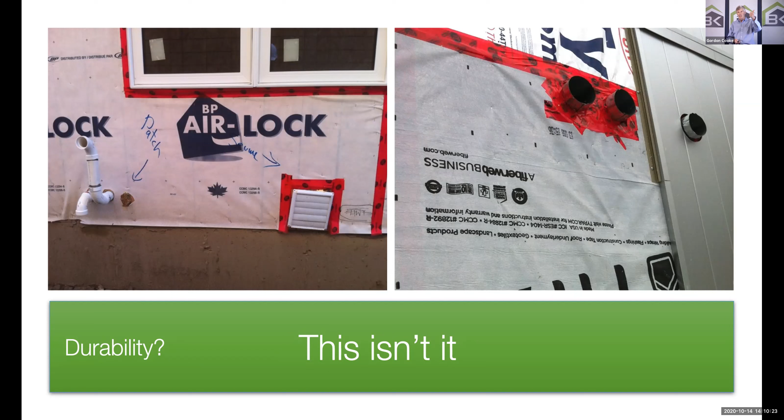And I would say the regular code build houses are still using red tape as flashing, and high performance builders on this call would say no, that does not meet requirements. Even though the code may say it's okay and the local building official said it's okay, this is not high performance. Red tape is not a flashing. We need to recognize the difference between air barriers and weather barriers, and in high performance training, that's what you're getting. So these penetrations not properly sealed, mechanical penetrations. So we have to help ourselves understand that we're building high performance houses that are good against air, good against heat, but most importantly, good against moisture is where we want to get to.

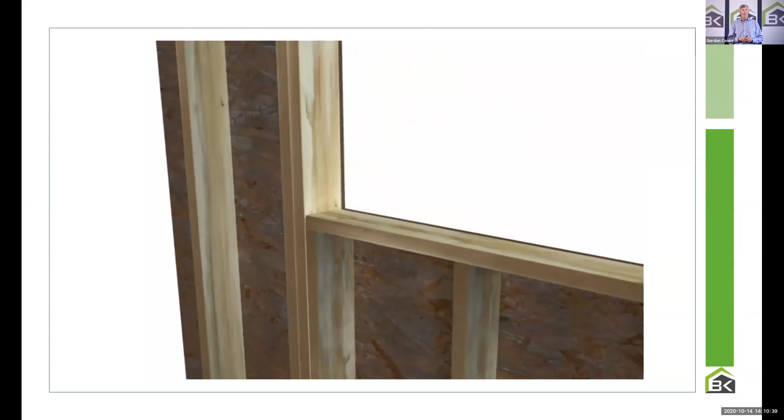I always like to show this quick animation of the 10 points. Remember I said 11 points for high performance? Here's the 10 points of proper window install. First, we should be sloping sills. Not all of you do. If you're not going to slope, you should at least be putting a back dam on the inside, not with foam, but with caulking. 2, a properly installed weather resistant barrier with proper button cap fasteners, not staples anymore, button cap fasteners. 3, the proper cut. I still see this done wrong all across the country. Proper cut that leaves the head and the sill clean and allows the jambs to be protected.

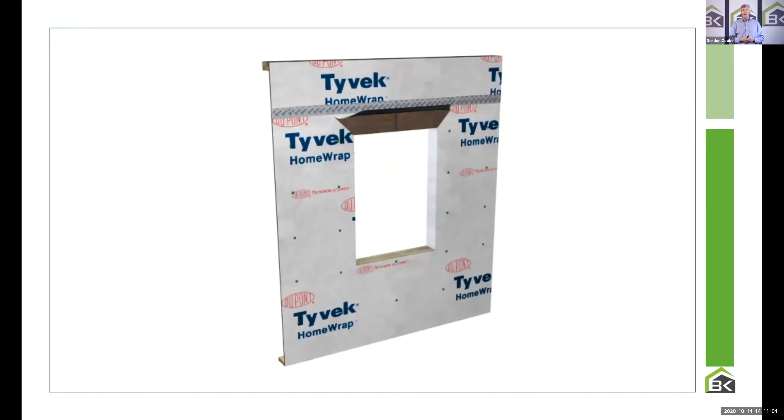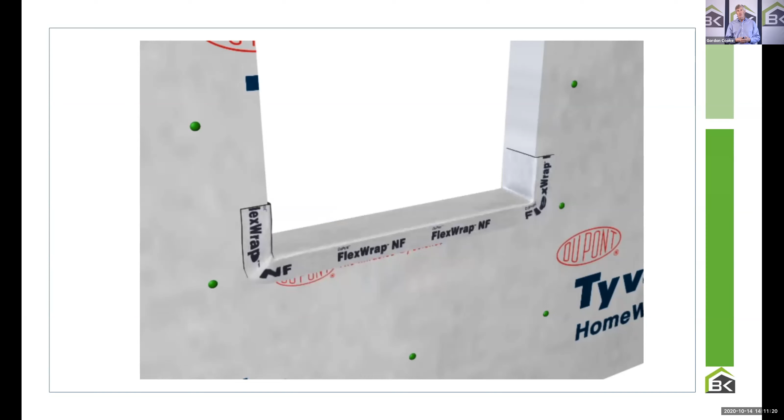That's point number 3. Point number 4 is that weather barrier up so that the window flange can go underneath. Point number 5 would be fully protected sill, to make sure that when water does leak in, it's not damaging that sill. Point number 6 is if a pressure roller shows up on site. All tapes have to be pressure rolled. Point number 7 is caulked on 3 sides, not the bottom, to let moisture out. Point number 8 is the window going in with the proper fasteners. Then 9 is the proper sequencing of flashing, and number 10 is folding that weather barrier back down to keep that shingled lapped effect. I see so many code houses that are not done correctly. I see most high performance builders doing windows correctly.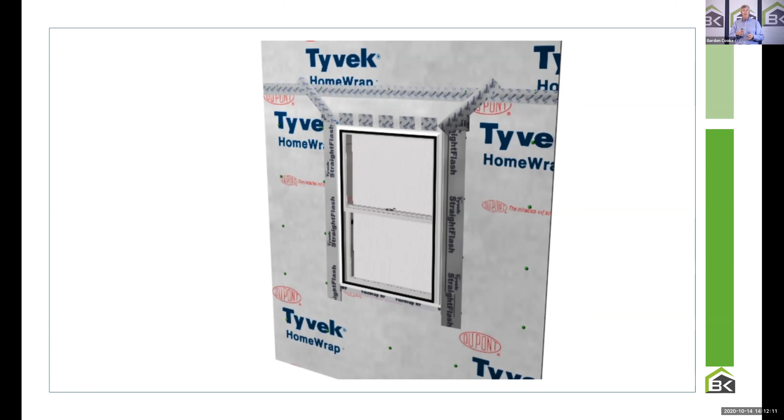If there's 10 points, how many are you getting? More importantly, how many do your clients think you should be getting? If you're back at school, what's a good number? 5 out of 10, 7 out of 10? I'm going to say to builders on this call, I need to be 7 to 8 out of 10 of those elements. Maybe you don't slope the sill. I'm okay with that. But let's make sure we're flashing our windows correctly so that we score 10 out of 10 or at least 8 out of 10 on our window installs.

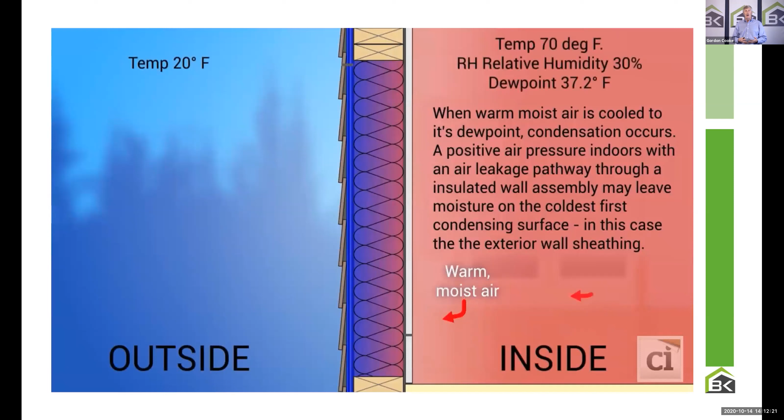And then I just wanted to highlight again the idea of proper moisture management. If warm, moist air from the house at even 30% relative humidity happens to get into a wall cavity, hits that OSB in the code A5 in Ontario, in the minimum code requirements of a house in the National Building Code, we're going to have condensation.

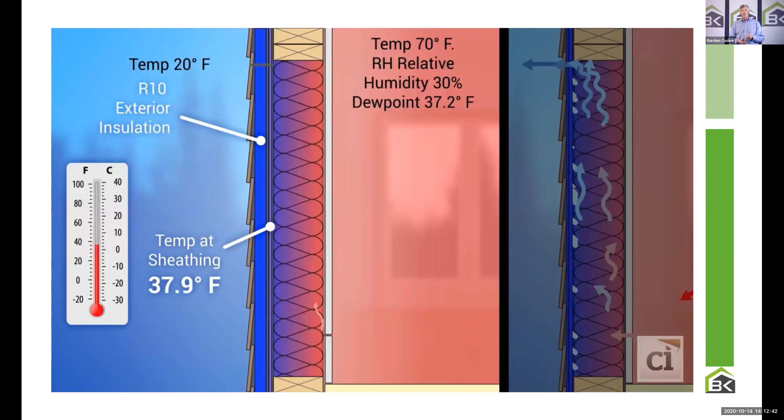And there's two ways to get rid of that condensation potential: one, stop the air leaks, or two, put insulated sheathing on the outside. And it turns out when you put R10 on the outside, in virtually every climate zone in Canada, you have no chance of condensation in the wall. When you make a wall airtight and when you put insulated sheathing on the outside, you effectively have no chance of interstitial condensation.

See where we're going with this? The durability. The same things you did for high performance. That continuous insulation, one of its single biggest attributes is it stopped the potential for moisture inside of walls. And why is that more important than ever? Because homeowners are going to want to keep the relative humidity not at 25, not at 30 like they used to, but 40 to 45. Why? Because of COVID, and they've been told to manage moisture inside their buildings.

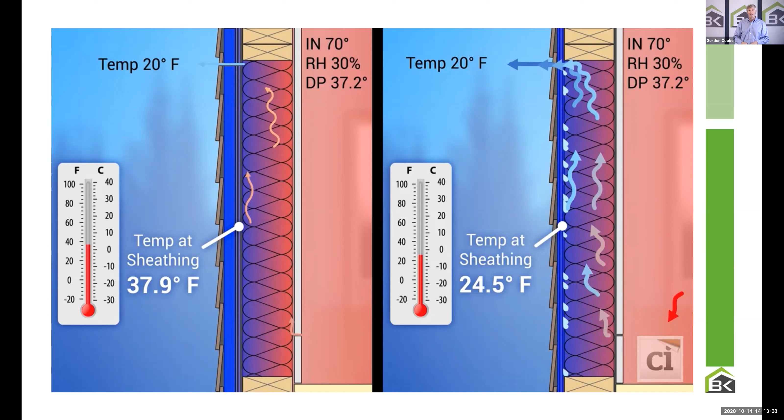The synergies of the building science. I won't do this one, you guys have seen that. Number 5 on the list is the cost of ownership. And I get to come to this one every time. The money's always at the end, but let's make sure we understand that it's a new investment. It's a new conversation with our homeowners, that they are now not just investing in a home that they're going to sleep in hours a day. They're now investing in their office building, in their school, in their play areas.

This is a new investment, and they're going to want to hear the fact that you have energy modeled, that you have helped them based on an energy simulation software with a registered energy advisor, that you are partnering with your trades and suppliers to find, through an integrated design process, the optimized performance of that building. So it's not just, well, code says, code says. No, this is specific to your area, specific to your style of buildings, the type of building, the usage of that building. So getting that best value by going through this process is so powerful in this conversation.

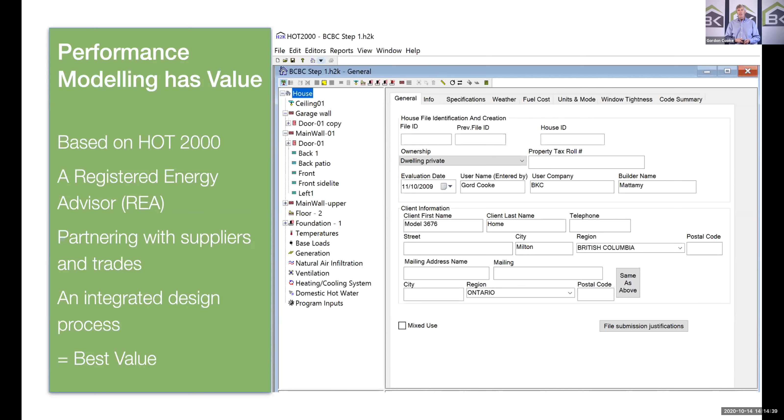This is now a building where they conceivably could be living their life 24 hours a day for the next, I don't know, 5-10 years. They're going to work from home from now on. Who knows, right? I know my son and future daughter-in-law are making a move to outside the city because they now feel they can work from home for the foreseeable future. So they're looking to upgrade, find a house that meets their investment needs. So they're thinking down the road of, where do I want this house to get to?

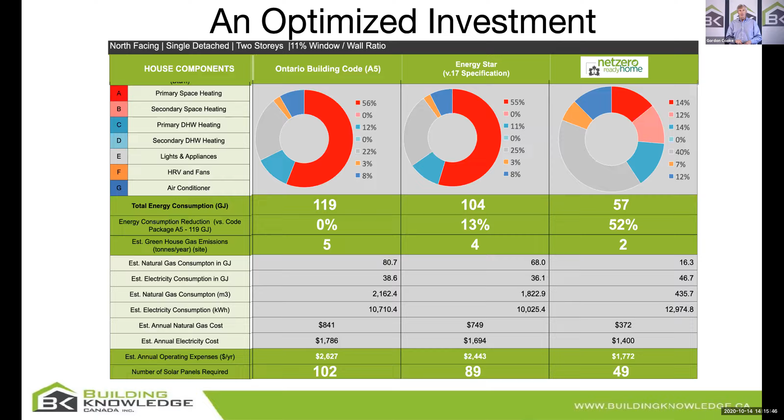And this idea that all the high performance elements that you're building in your houses actually works really well against the idea of how many solar panels. So optimizing the enclosure against the future cost of renewables, that I think is a very powerful term that you want to think about. I do it in straight money terms as well. Some of you have seen me do this before, but here's the conversation. How much does net zero ready cost? Well, in most areas of the country, it's about 15 grand.

And people always say to me, is it worth it? Well, okay, you're a homeowner. I always ask, have you got $15,000? Yeah. Where is it? Well, it's in the bank. What's it earning? 2 to 3%. Good for you. That $15,000 is earning you about $300 to $450 a year. What if you put it into your house and invested it in the house? And you'll find, through the graces of Enbridge encouraging you to use energy more wisely, you're going to use a little less gas, in the order of $85 a month.

And if I said I'm going to borrow the $15,000 on the right-hand side, the extra cost of that loan is only in the order of $75 a month. And so I pay the bank $75 a month more. I pay the utility, Enbridge in this case, $85 less. And Susan's saying, yep, that's fine. We're good with that. And now you've got a better home for basically the same price.

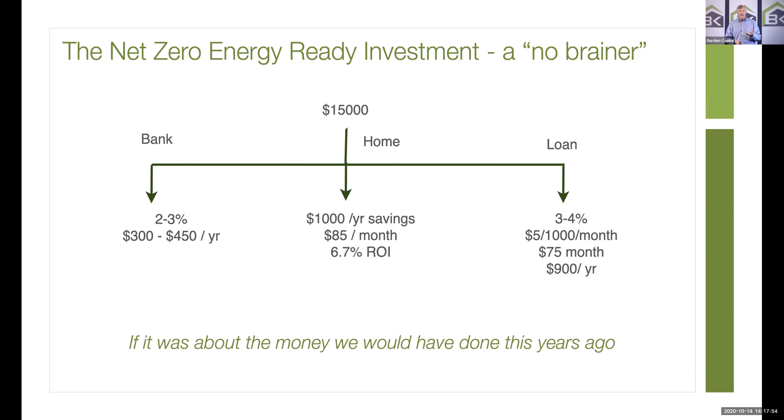And they understand this. They say, okay, didn't used to worry about the savings from a house perspective, but now when it's my house, my office, my school, this starts to make sense. And this idea that if it was about the money, we would have been doing this years ago. But the fact of the matter is, this was a development out in Calgary that was able to show that a net zero house had roughly the same cost of ownership of a standard building code building. So that you get this idea that it's a good investment is where we want to get to.

And when you understand the total cost of ownership, it becomes a win-win-win. A win for the utility. You're going to say, why a win for the utility? Because they get to service more houses with the same gas pipe. A win for the homeowner because they get a better house, a better building, a better school, a better office for the same monthly cost. And a win for you because you get to build a high-performance house that's safer, healthier, more comfortable, more durable over time. So very, very powerful.

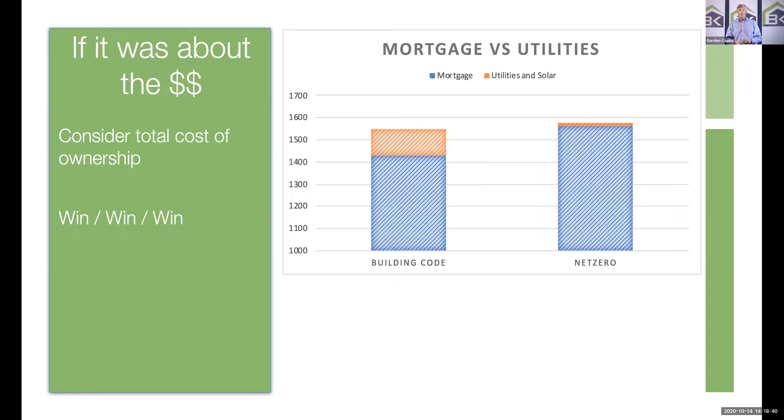And of course, you're going to recognize they need some proof on that. As I finish up just a few slides, recognizing that it's very important in this conversation to develop proof statements. CHBA's done a really nice job of this to understand that the net zero program is so powerful because it gives people a seal of approval, a seal of trust.

Just as an example of that, the property management fellow who called me from Toronto, he said, is there some sort of certificate that I could get, that I could give to my tenants that would show that I've done everything possible that I can do? Isn't that interesting? In a business sense, the property management firm wants to be able to prove to his clients that they've done everything possible. And I said, frankly, there is nothing. I said, in housing, there is.

There's programs like Energy Star, programs like Net Zero Ready that allow us to certify or qualify houses as being higher performance. Well, LEED, I guess you could do that, but these are existing buildings. So LEED certified buildings would help you with this as well. So I did mention LEED. He goes, I don't know if I can do that at this point. But the idea of certification or validation is really powerful.

And then just to say the last few slides, I said to you at the beginning, is it okay to talk about this? So Steph, let's do that last poll real quick. Last poll. Yeah, it should be no surprise, right? Of course they want all of the above. They wanted all of that.

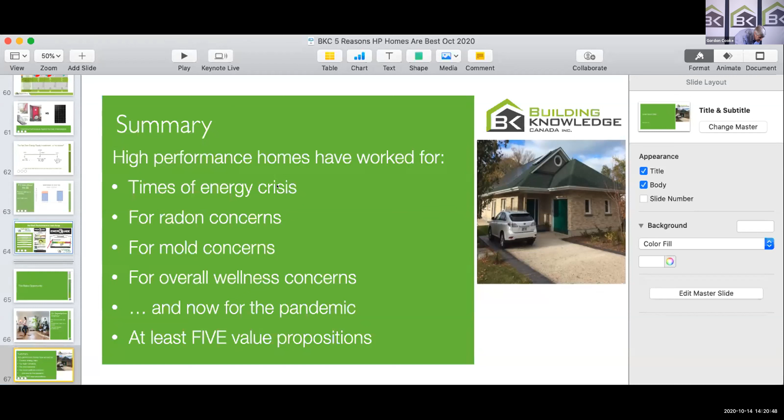Oop, how do I get rid of that again? Sorry. My apologies, be right back, just a second. Can't seem to get rid of that poll. Can you still see the poll on my screen? Steph, can you still hear me? I do not see it on your screen. Okay, good. So I can just finish up.

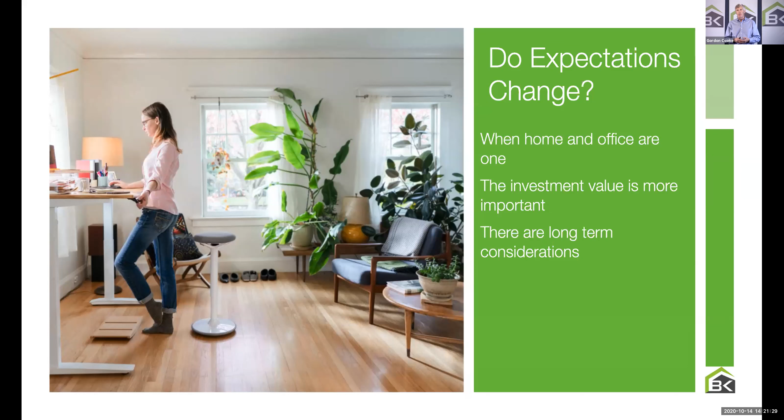Yeah. So the point was that everybody would say all of the above, right? And so understanding that the expectations are changing, have changed. When home and office are one, when the investment value becomes more important, and there are long-term considerations to the decisions they're now making. I just want to remind you, it's okay to talk about this, to say to people in a soft way, the same things that we've been doing for energy, the same things we did for mold, the same things we did for radon back in the day, also have impact from a COVID perspective.

So you're not taking advantage of the situation. You've been there. You've actually done this over time. You haven't changed the way you're building if you're building high performance. It just turns out that high performance houses are indeed better from an overall health and wellness perspective. So keep that in mind.

The second thing you do understand is buyers are fairly fickle. It turns out that 80% of air conditioners are sold 2 days after the hottest period in May. That is, people forget about their air conditioner until the hot day in May, and all of a sudden everybody needs air conditioners. We know that 90% of renovations are done in the 6 months before somebody sells a house, and the 18 months after they buy the house.

Our minds are busy, and therefore they're focused on very specific things at points in time. And maybe I said 90% of the 60% of renovation stuff. You know that number better than I, but you get the idea. When something comes to the fore, like COVID, we absolutely can help people and give them assurance. Why? Because we're not doing anything we haven't been doing anyway. That's why you have the legitimacy, the credibility to say, we absolutely can help you with this.

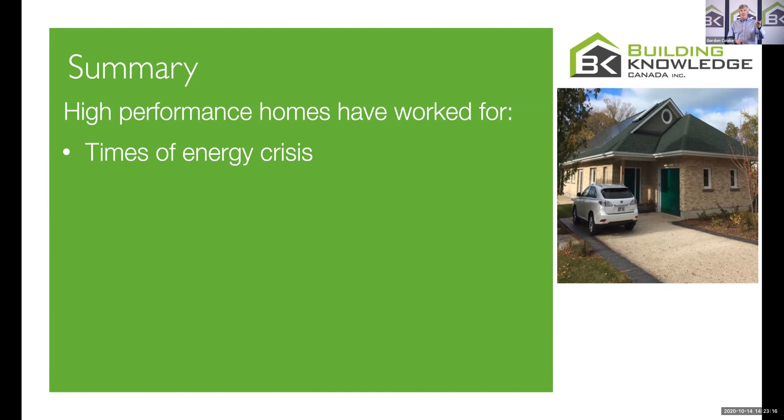And yes, we still need to physically distance, and yes, we need to wash our hands, and we need to be careful, but the houses we're building have this tremendous value. And the summary is this: high performance houses are of tremendous value. They were tremendous value in the times of energy crunches back in the 70s and early 80s. That's why we started doing high performance.

They were very important in the radon concerns of the 90s, when radon was all the rage in the United States. They basically started building high performance houses. We see the same here in Canada. They were very big in the mold concern days. That also happened in the 90s, and we went right back to the principles of high performance houses managing moisture. And they've always been there for overall wellness.

That is, CMHC, when they developed a housing protocol for the environmentally hypersensitive, Virginia Salares, CMHC created a protocol to build houses for the environmentally hypersensitive. Frankly, they used R2000 as the basis of construction. The same principles we used for energy, we also used for health, safety, durability, and comfort. Hopefully that's useful to you as we finish up.

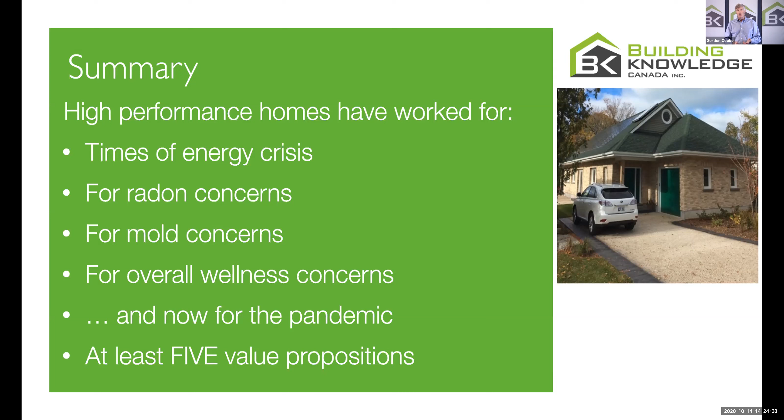And so for the pandemic, the good news is the viruses are impacted in the same way, or at least are in the same category, that we can minimize infectivity rates if we build high performance houses. So hopefully that was useful to you. I mentioned at least five value propositions. There's more than those, but we'll just move to questions, Steph.